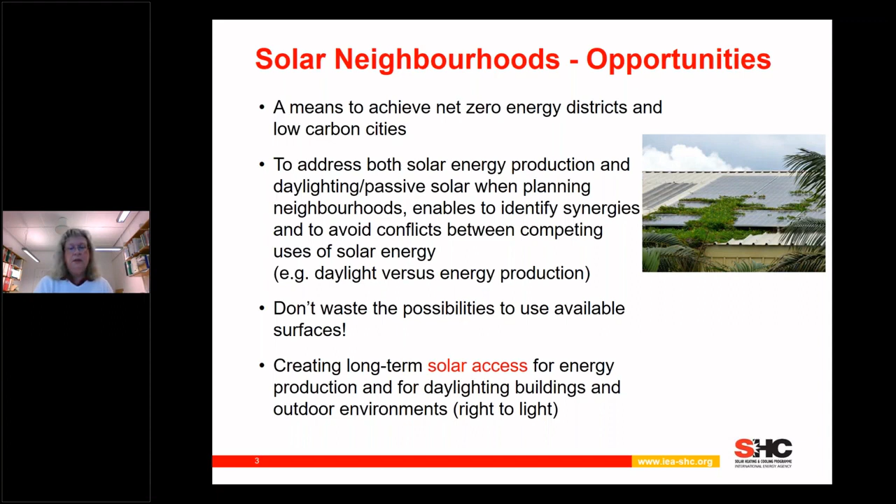And we need to create long-term solar access. This is very important - for instance, if you have a house where you put solar panels on the roof, you don't want your neighbor to erect a building on the other side of the street just one year later, destroying your solar gains and your investment. So you really need secure access to solar access for a long time, and this is something we need to be better at when planning cities.

Going to the project specifically, we started in 2019, and the project ends in 2023, the end of the year. So we are midway now, and the objective is to support key players to achieve solar neighborhoods that really facilitate this long-term solar access with good planning.

And we work on new neighborhood development and on improving existing neighborhoods as well. We deal with both active and passive solar strategies. We define a neighborhood as a group of buildings within a specific geographic area, often including different types of buildings and functions, open space and infrastructure. The neighborhood can be part of a large city, an isolated community, or something in between, and of course it can be connected to a district heating or cooling network or outside such - this gives different boundary conditions we have to take into account when planning.

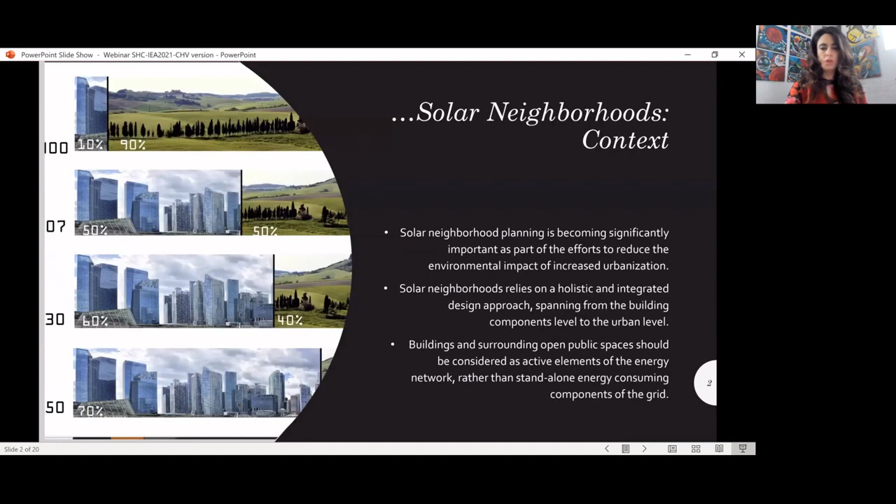Starting with a little bit of context, solar neighborhood planning is becoming significantly important as part of the efforts to reduce the environmental impact of increased urbanization, where by 2050 we expect 70% or more of the world population to be residing in urban areas.

Solar neighborhood relies on a holistic and integrated design approach that spans from building components and building level to the urban level. Within this holistic approach, buildings and surrounding areas, including public spaces, landscape, streets, and street furniture, should be considered as active elements of the energy network rather than standalone energy-consuming components of the grid.

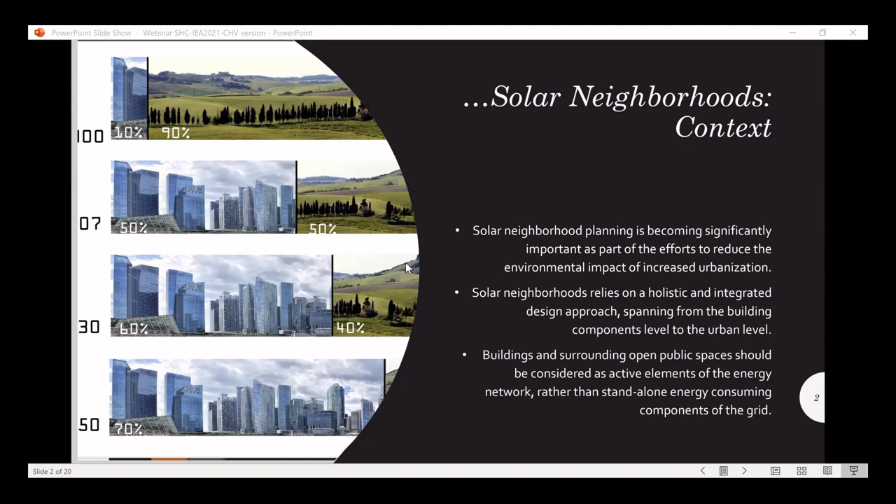So at the building level, solar building design relies on passive designs in buildings. In fact, passive design is often attached to solar building design. Improving solar access together with various design principles such as thermal mass, high insulation, and airtight envelope are some of the basic principles of passive solar buildings.

These principles can be implemented in all types of buildings, including residential, offices, and institutional buildings. Daylighting, passive heating of perimeter zones, passive and hybrid ventilation, coupling ventilation with solar chimneys, as we can see in some of these sketches, can significantly affect energy demand, reducing the energy consumption of buildings and their dependence on the local grid, which can also increase the resilience of buildings to climate shocks and climate risks.

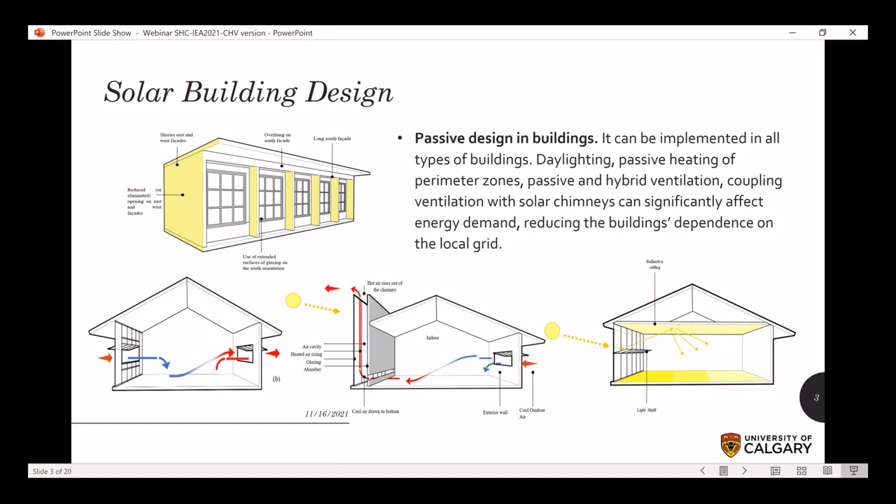Solar building design allows us to improve energy efficiency of buildings, designing building shape, layout, and building envelope to maximize solar access and utilization within the building, which affects the energy consumption of these buildings.

It also allows for better designed solar energy generation, since a well-designed building envelope can be exploited to integrate solar technologies such as photovoltaic systems, thermal collectors, or hybrid photovoltaic thermal systems for the generation of electric and thermal energy.

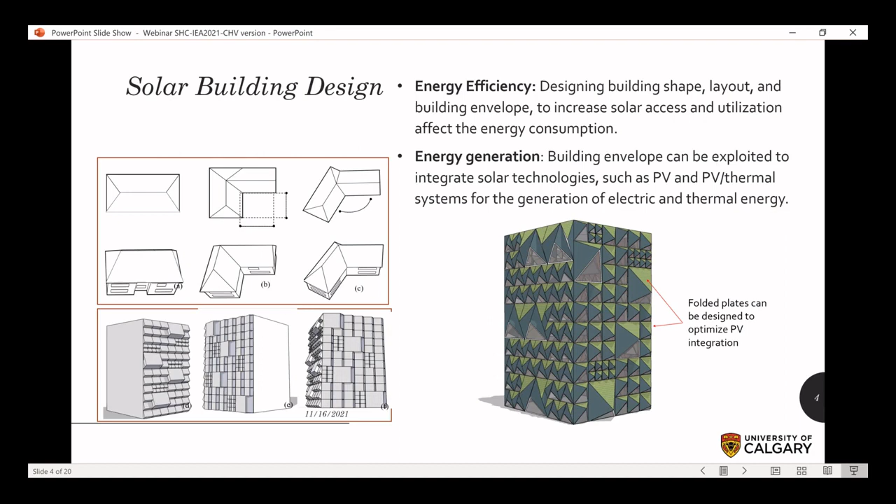Talking a little bit about building envelope design and the integration of technology, building envelope can be optimized to maximize surface area and exposure to solar radiation while preserving architectural and aesthetic flexibility. These are some examples of a theoretical study done by myself and my group at the Solar Lab at the University of Calgary.

We tried to optimize the building envelope shape geometry through different designs of folded plates that allow maximizing solar radiation on these plates. We were also integrating different types of photovoltaic systems in different colors.

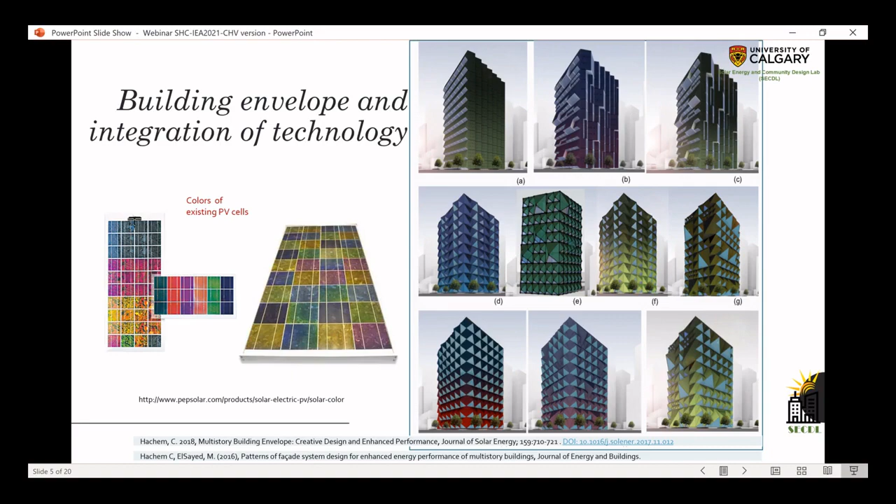At the neighborhood level, many aspects affect optimal solar planning. For example, the type of neighborhood and the building mix present can affect building designs and, as such, available surfaces for solar technologies. Also, the ratio of commercial to residential buildings within a specific neighborhood type is important, especially when the goal is to achieve net zero energy status.

An optimal ratio of commercial land area to overall built land area can be between 23% and 32%. This is according to a theoretical study we conducted, where according to this ratio, we were able to integrate enough photovoltaic panels to achieve net zero energy within a mixed neighborhood.

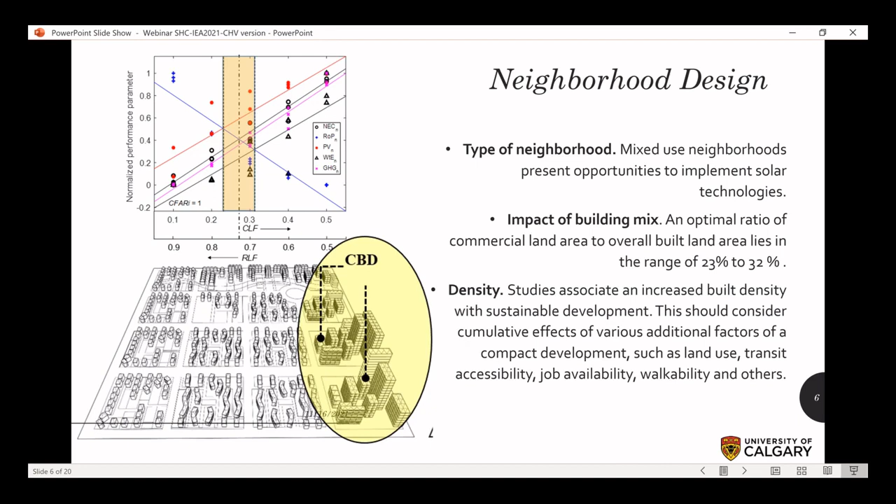Density is another important and critical factor in the design of solar communities. Studies associate increased built density with sustainable development, but this should consider cumulative effects of various additional factors of compact development, for example land use, transit accessibility, job availability within walkable distance, walkability, and others.

There are other important elements in the design of a neighborhood that also impact their solar access and solar potential and their design as solar neighborhoods. This includes green and spatial areas. Landscape can offer solutions for the integration of photovoltaic panels as well as solar thermal collectors, and allows really to generate more energy that can be utilized in these neighborhoods.

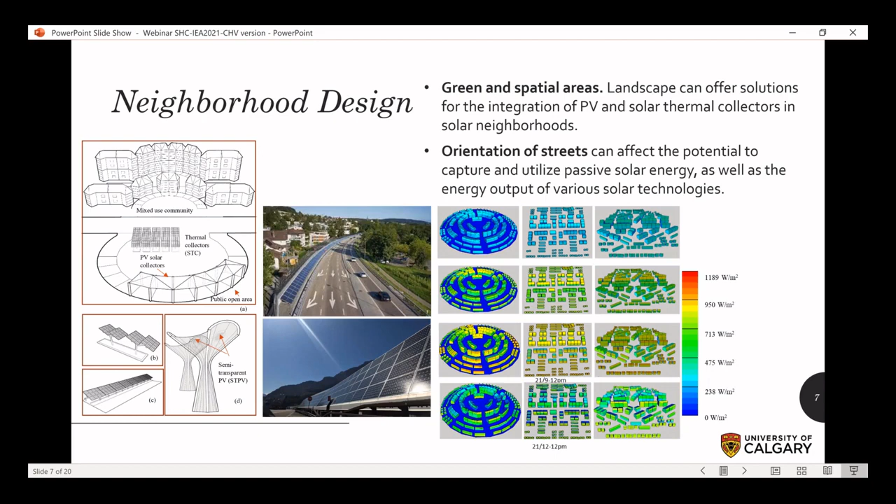Orientation of streets can affect the potential to capture and utilize passive solar energy as well as energy output of various solar technologies. As such, they really should be considered from the early design stage, and the buildings around them should be designed to get the best performance with the best orientation.

Now, talking a little more in detail about the work currently ongoing in subtask A, we developed specific designs of archetypes to study solar strategies. Archetypes in this task are considered as representative neighborhoods of existing or new patterns in different countries. This includes repetitive patterns of commonly applied design, such as streets, building types, shapes, density, etc.

Here is an example of commonly seen neighborhoods in North America, residential neighborhoods where we see a grid layout together with attached and detached houses.

Other examples of archetypes can represent uncommon or innovative examples. We have a few of these that were also presented and proposed by the experts in subtask A, such as Sinfonia in Bolzano, the campus in Norway, and so on.

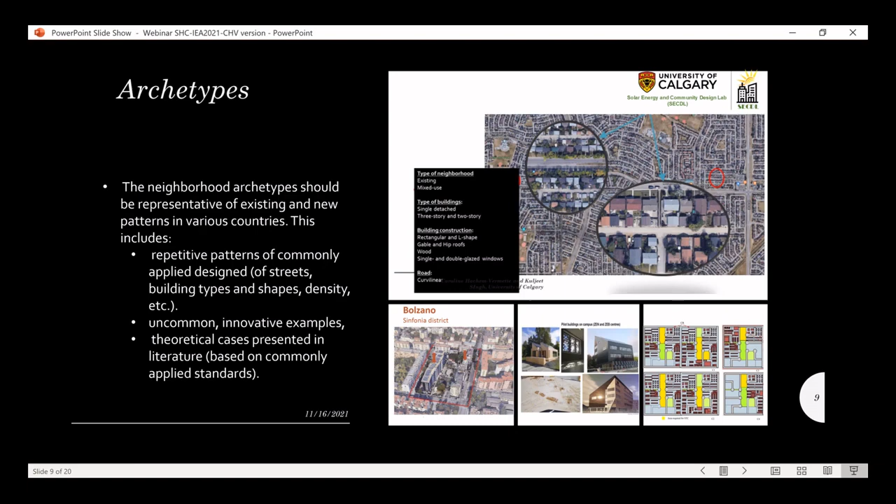Other archetypes can be theoretical cases presented in literature or especially developed to study different strategies. Here are some examples of theoretical neighborhoods, and I'll be talking a little about these and some of the results we obtained in a couple of slides.

A methodology is also developed to collect information about these archetypes, including building types, materials employed in buildings and building envelope, outdoor areas, and materials employed in those outdoor areas, streets, etc. This information is collected in what we call a matrix, an Excel form that can facilitate input into various simulation tools, allowing us urban level simulations.

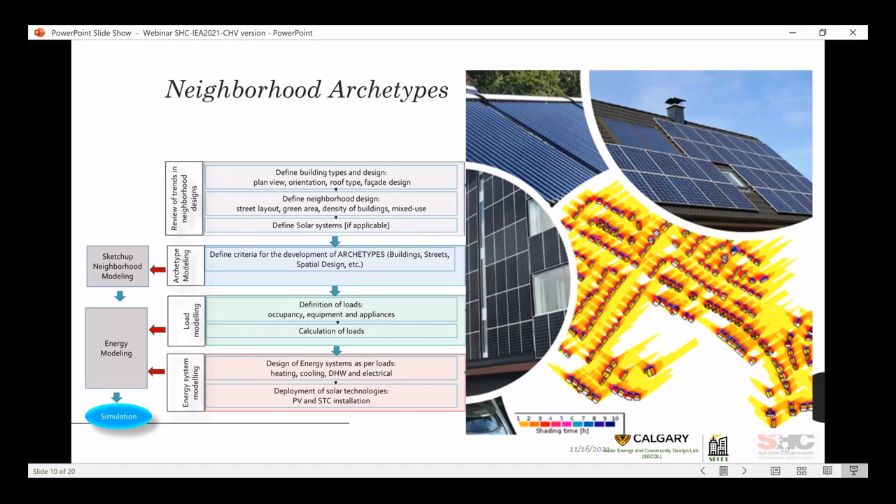Once the base neighborhood of each archetype is established, various solar strategies can then be analyzed.

Here I'm presenting some of the theoretical examples I just mentioned, what we call neighborhood units. These are small neighborhoods designed according to various sustainable measures, ranging from residential dominated neighborhoods to higher density neighborhoods with commercial centers that include different types of trades and different types of buildings.

The study aimed at analyzing various renewable energy sources and the role of solar energy for thermal and electrical production. I want to highlight that PV was accommodated on roofs and some portions of facades when available, meaning when we have high-rise buildings, and solar thermal collectors are accommodated in parts of the roofs when PV area allows for this, and in landscape areas.

Results of this study show that PV electricity plays an important role in fulfilling a significant portion of the total electricity need of all the neighborhoods, especially up to 95% for small scale or less dense neighborhoods.

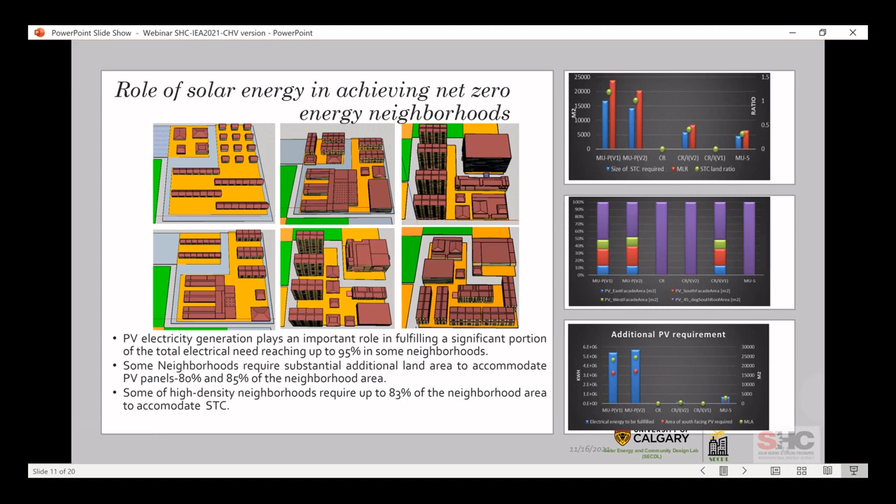Some of the high density neighborhoods also require significant additional area of landscape to accommodate the solar thermal collectors to fulfill the thermal requirement.

In this example, some of the small neighborhood units shown before were combined together according to their electrical energy performance, to allow achieving net zero electrical energy. In this case too, PV plays a significant role in achieving net zero electricity status. In all these neighborhood combinations, the major portion of PV electricity is supplied by roof-mounted PV systems.

The study also shows that on-site sources can supply between 19% and 45% of the thermal requirement for the neighborhood combinations, but we still need additional solar thermal collectors, especially in high-density neighborhoods and larger neighborhoods.

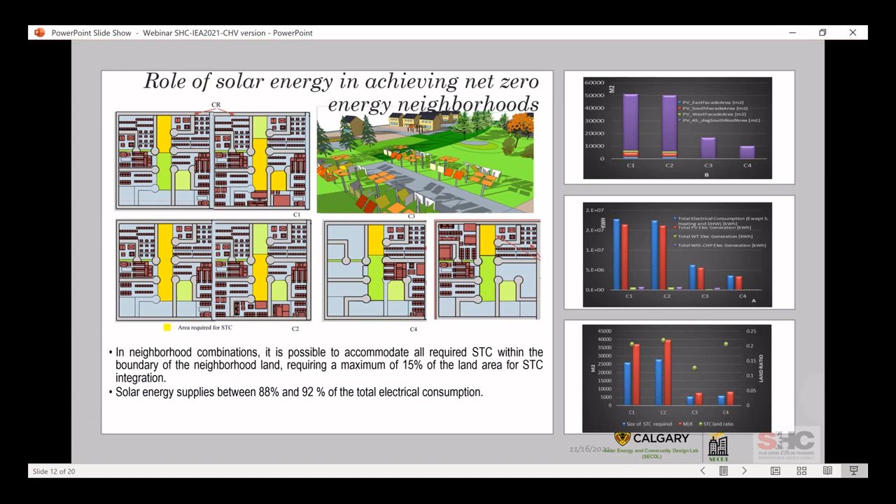This landscape area that's required to install these solar thermal collectors is significantly lower than the examples I showed before for the smaller neighborhoods. The landscape area can be about 15% of the total land of the neighborhood, which can be much lower than examples before, but also more feasible from an urban planning point of view.

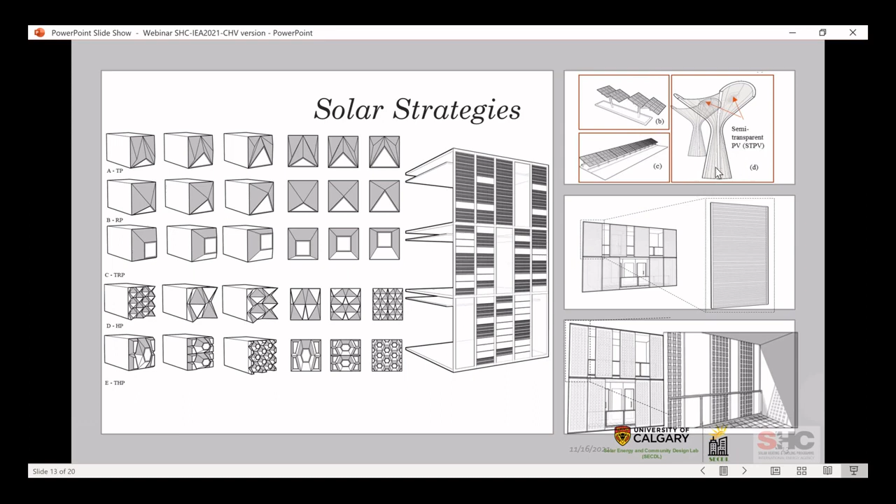Now, coming to the design of solar strategies and their analysis, different solar strategies will be analyzed using the archetypes or archetype concepts I just talked about. This includes, but is not limited to, integrated solar technologies in roofs and facades, and landscape integrated solar systems that can range from very traditional standalone elements to more interesting and designed ones. A workflow is developed to implement and analyze solar strategies, taking into account factors such as spatial design of the neighborhood, the optimal surface areas to integrate technologies, neighborhood operation, and interaction with the local energy system, both electrical and thermal.

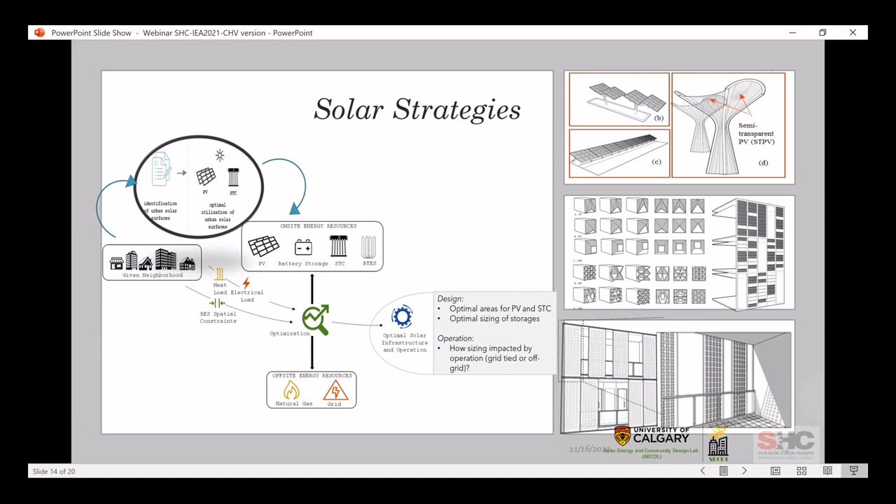Coming to the deliverables of subtask A, there are a number of them, but I want to highlight the most important. Two summer or fall schools are designed. One fall school was already conducted in September and October of this year, attended by about 14 PhD students from 6 countries who were trained in complex urban level simulations. Instructors from 9 different institutions were involved in the training. The next summer school will be conducted next year, hopefully in person in Calgary.

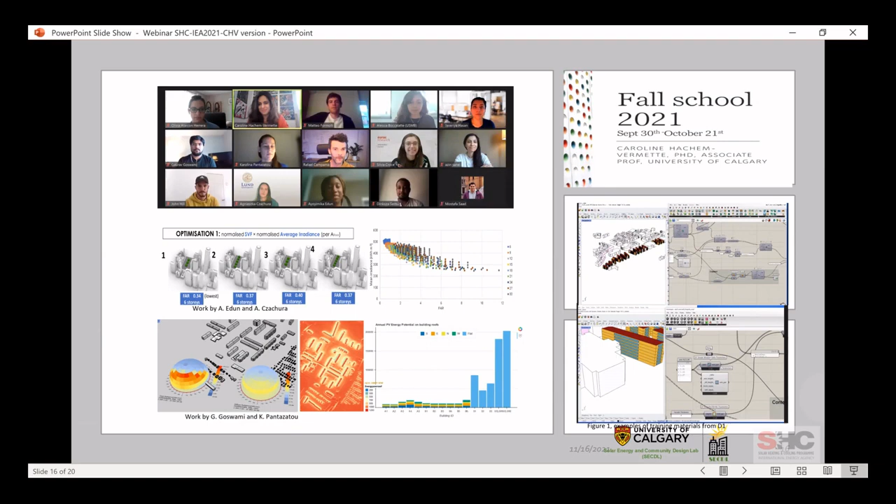The final deliverable of subtask A, still under development, will consist of a web-based database presenting various solar strategies and their potential application in example neighborhoods under different climates. Neighborhoods or solar technologies can be selected according to the type of neighborhood and the available archetypes studied, with results shown to give examples of how to apply these solar strategies and what their impact is. This can offer flexibility of design for planners, architects, developers, and other key stakeholders by presenting examples of potential solar solutions for different settings.

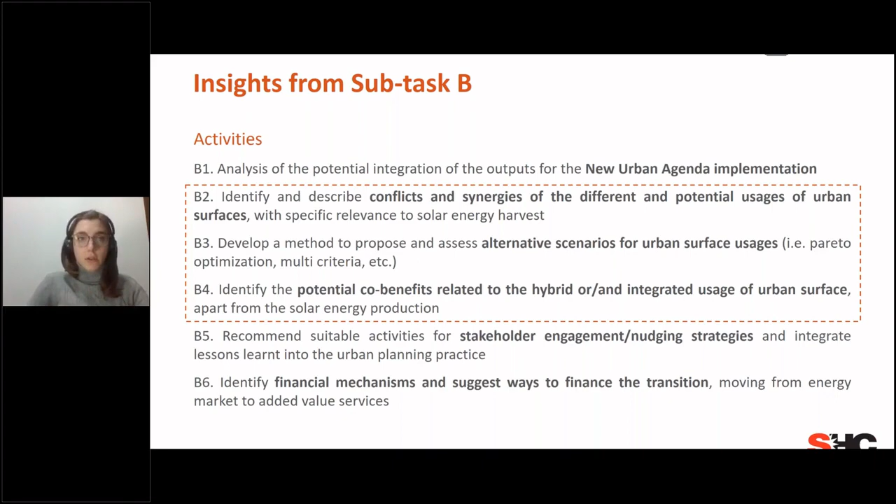So, welcome everybody. What I will present today, as Barbara already mentioned, is related to the work we are conducting in subtask B in relation to the use of urban surfaces and the related benefits in solar neighborhoods. In subtask B, we are focusing on economic strategies and stakeholder engagement with the aim to foster the use of passive and active solar strategies, looking not only at economic values but also added values and co-benefits that solar energy might bring. We have a broad range of activities, and today we will look at results and work in progress in three core activities related to the use of urban surfaces in solar neighborhoods. Why are we looking at surface uses in solar neighborhoods, and why are we trying to define the most suitable surface uses in such urban areas?

What we would like to achieve is having a broader focus. So we would like to consider all the surfaces available in our urban areas, which, as Barbara mentioned before, are a very relevant but limited resource. And we would like to aim to use them not only for solar energy production or passive strategies, but also for the integration of a wider variety of solutions.

Why this? Because actually the surfaces of our solar neighborhoods and urban areas have an unprecedented exploitation potential. We have seen from studies in literature that roofs allocate approximately 20 to 25% of the total urban surfaces, and the surface of the facades is almost double. So by using all these available surfaces, we might enhance not only energy efficiency and renewable energy production, but also positive environmental impacts.

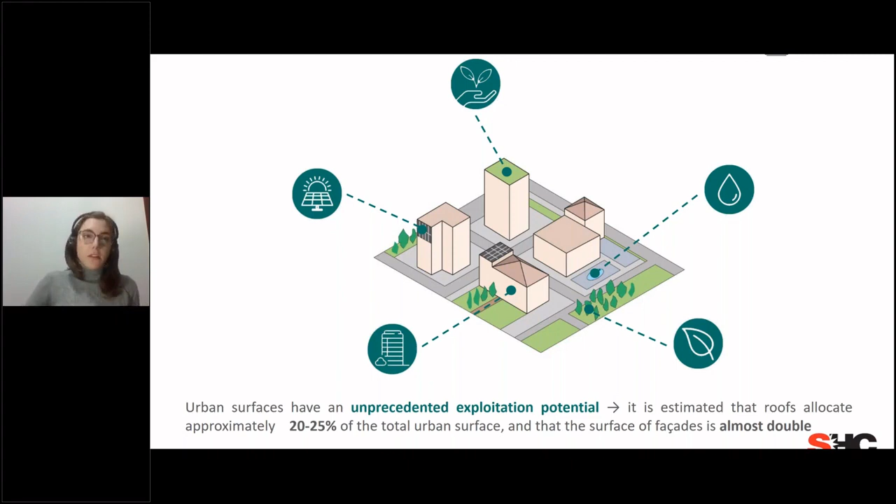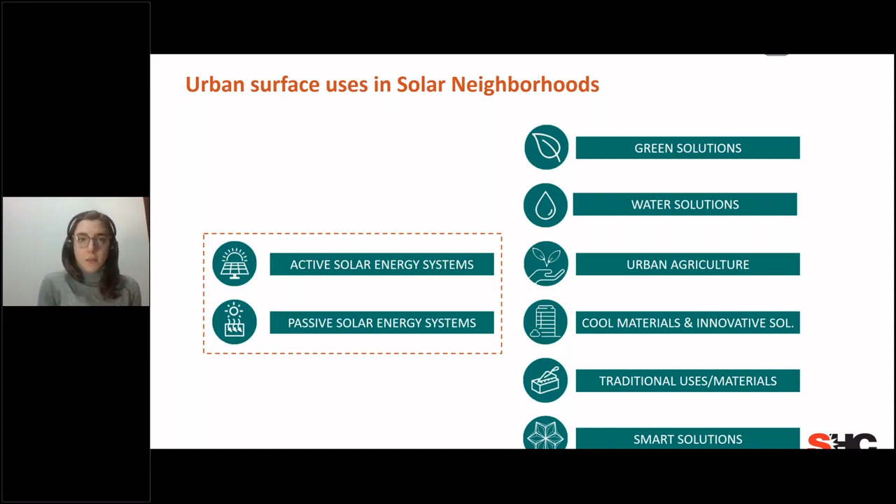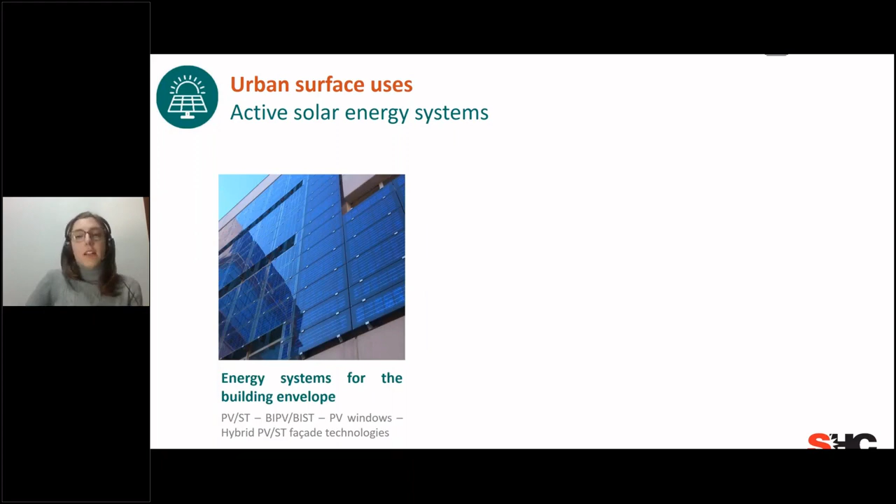So what we are focusing on is not only active and passive solar energy systems, but a broader variety of solutions which we collected and discussed among the task experts in subtask B. When we refer to active solar energy systems, we include not only energy systems from the building envelope, which are the wider known solutions, but also energy systems from ground surfaces, such as PV pavements and asphalt solar collectors for ground surfaces, and energy systems for urban features, such as the acoustic PV road barriers you can see in our picture.

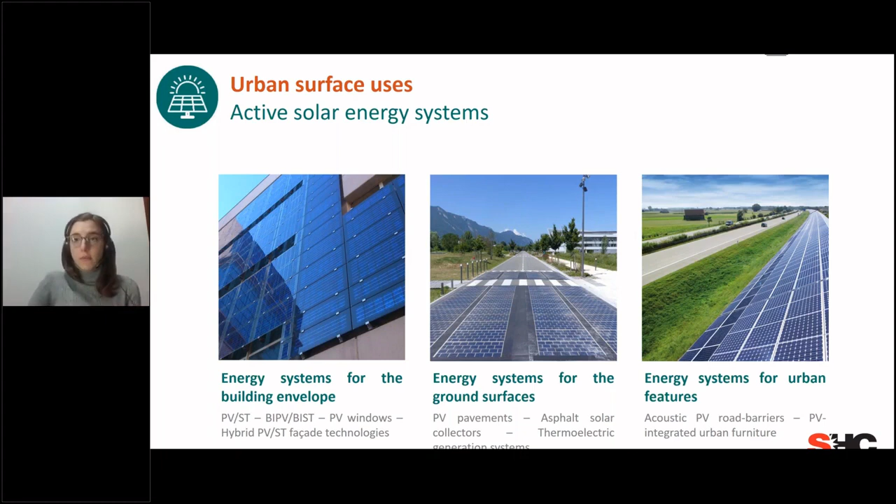And when we refer to passive solar energy systems, we focus on passive solar heating and passive solar cooling. But we also broaden our focus to other solutions, as I previously mentioned.

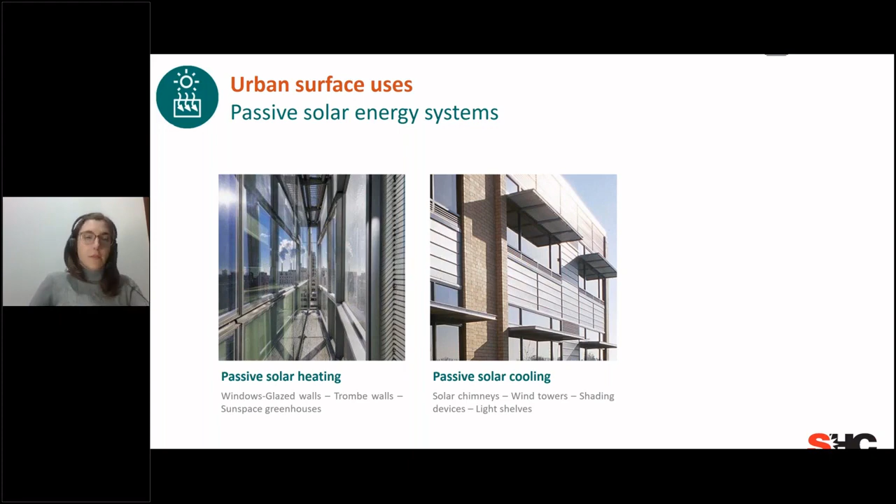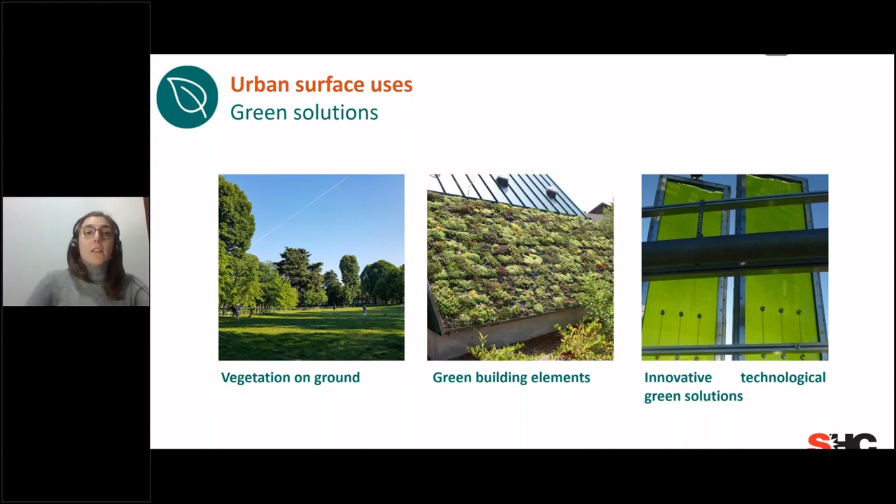So for example, we have green solutions, which include not only vegetation on ground, but also green building elements such as green roofs and green facades, and other innovative technological solutions such as microalgae panels for the production of energy. We also have water solutions which might be used in solar neighborhoods, from water bodies to evaporative techniques.

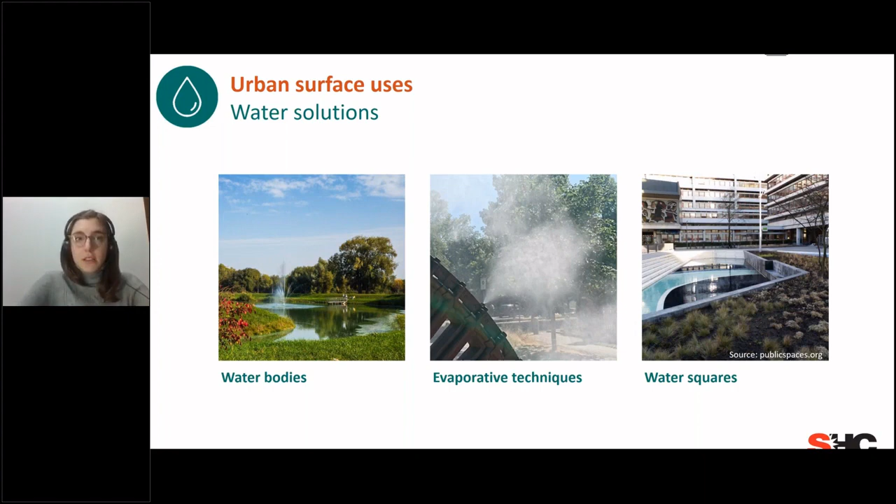These techniques reduce peaks of air temperature during summer, such as water squares. We also included the potential to use urban agriculture, both ground-based, building integrated, or other forms of urban agriculture, such as beekeeping in our solar neighborhoods.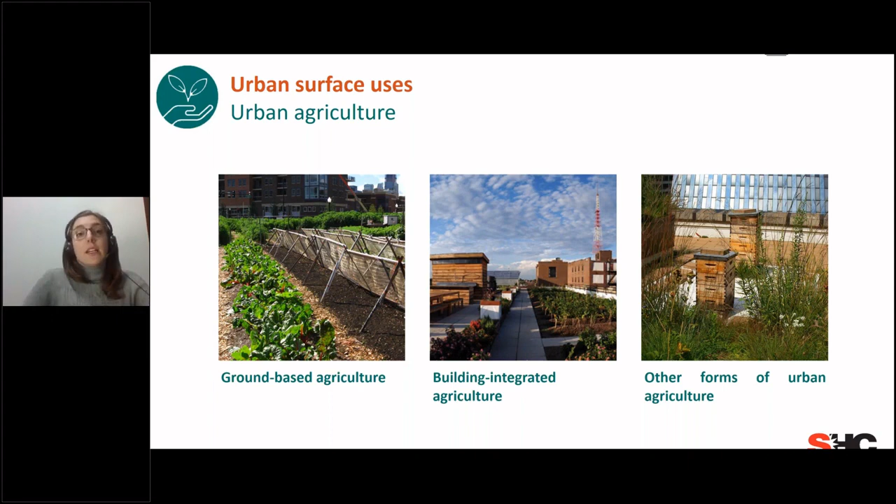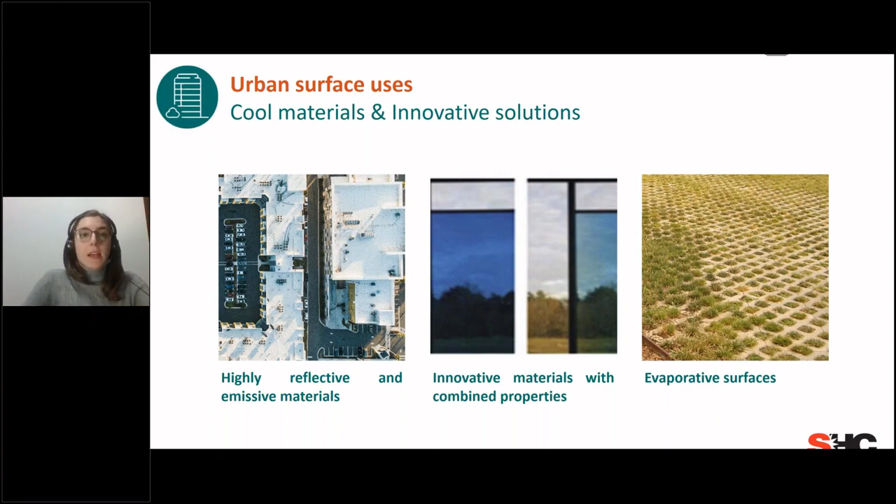And last but not least, we also consider cool materials, so highly reflective and emissive materials, which allow keeping the surfaces of the building envelope cooler, and which are also strongly related to solar radiation, and other innovative solutions. We also consider, obviously, the presence in solar neighborhoods of traditional uses and materials, which actually build our urban areas, but also the potential for smart solutions.

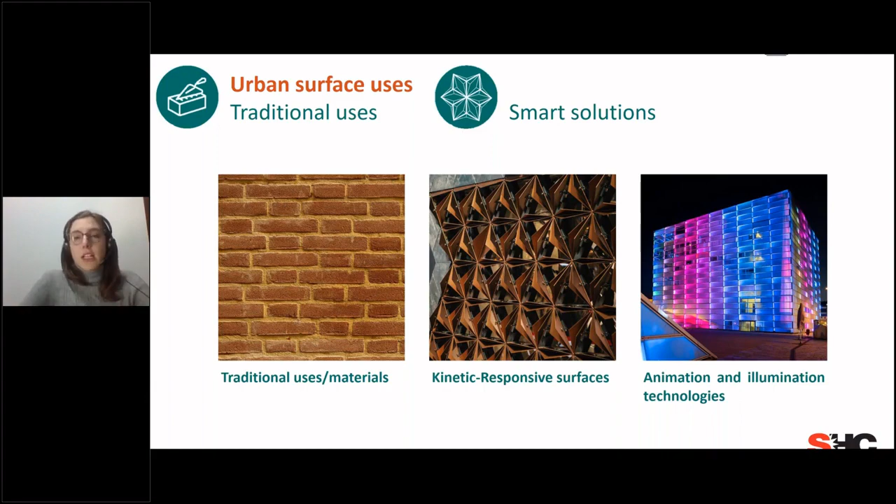What we then discussed in subtask B are the conflicts and synergies which may arise among surface uses. So the question we posed ourselves has been: can we integrate solar active and passive systems with other solutions in order to better exploit urban surfaces?

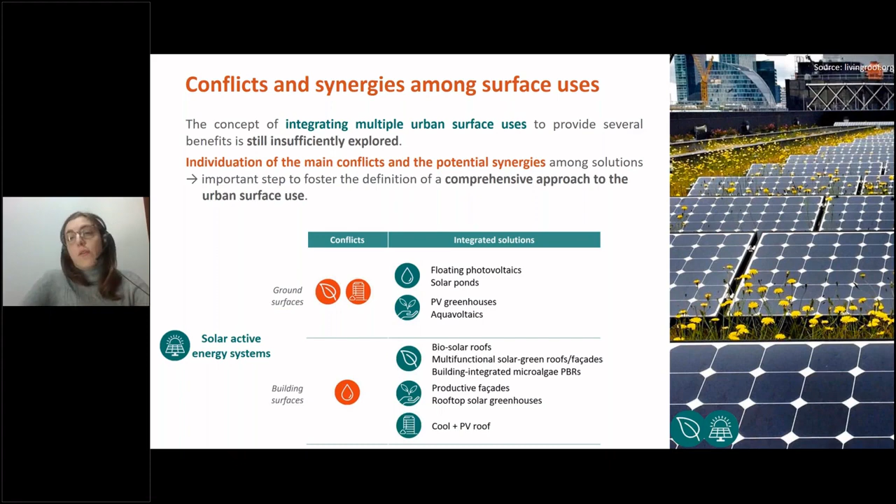What we did was create a sort of matrix in which we analyzed conflicts and synergies among solar active energy systems and other solutions. One case is shown in the picture on the right, a biosolar roof, which integrates PV systems with a green roof, which also acts as a cooling element for the panels and helps enhance energy efficiency. But there are also other solutions, such as multifunctional solar green facades and cool roof integrated PV. So just an example of what we would like to do in fostering the use of urban surfaces.

This is the case study of an industrial neighborhood in Bolzano we are analyzing in the context of Task 63. And this is relevant because it covers a large portion of the city of Bolzano.

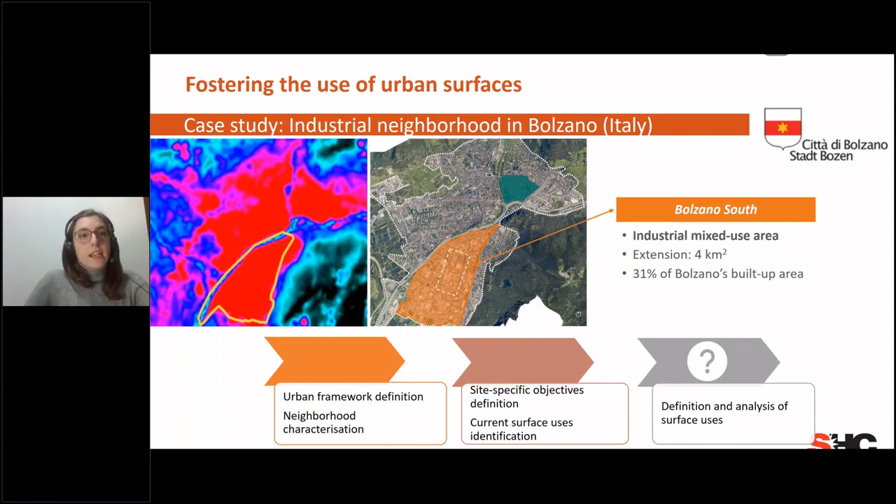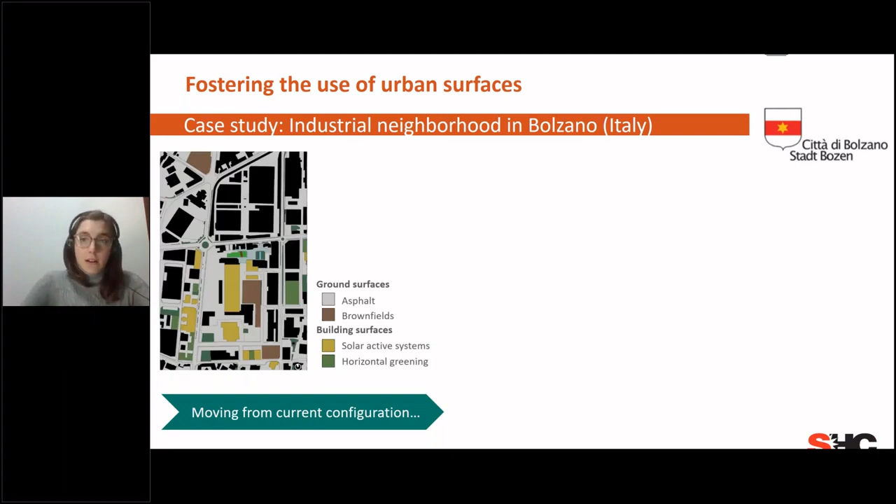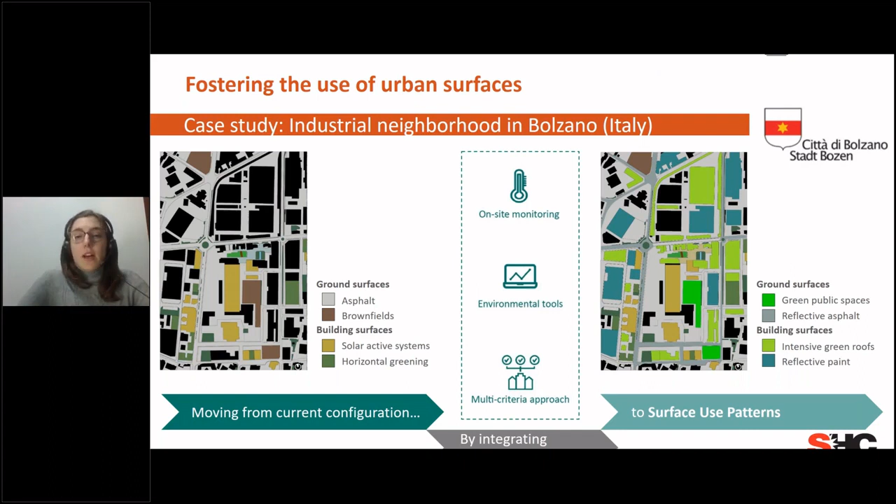What we would like to propose through our activities in the task is a methodology for moving from the current configuration of the district, which integrates common surface materials and some solar active systems, to a surface use pattern, a configuration of the district which integrates also more innovative solutions, where the use of solar active systems is enhanced, and there are also other solutions such as green solutions. How this might be done is through several methods, integrating on-site monitoring, the use of environmental tools, and also multi-criteria approaches.

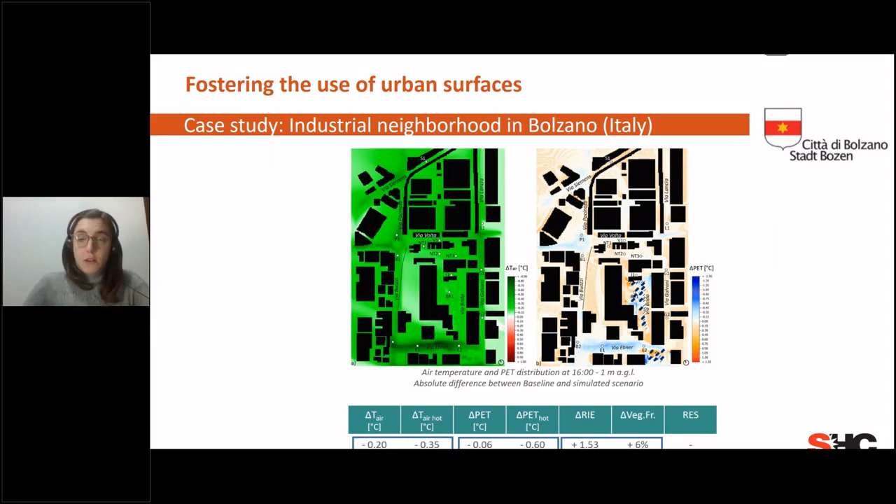So what's coming next in relation to these activities in subtask B and in task 63? First of all, by the end of February, we will release our first deliverable, a report on surface uses in neighborhoods, focused on how to define the most suitable uses, but also avoid conflicts and create synergies. If you're interested, keep an eye on our website, and you'll soon find our first deliverable.

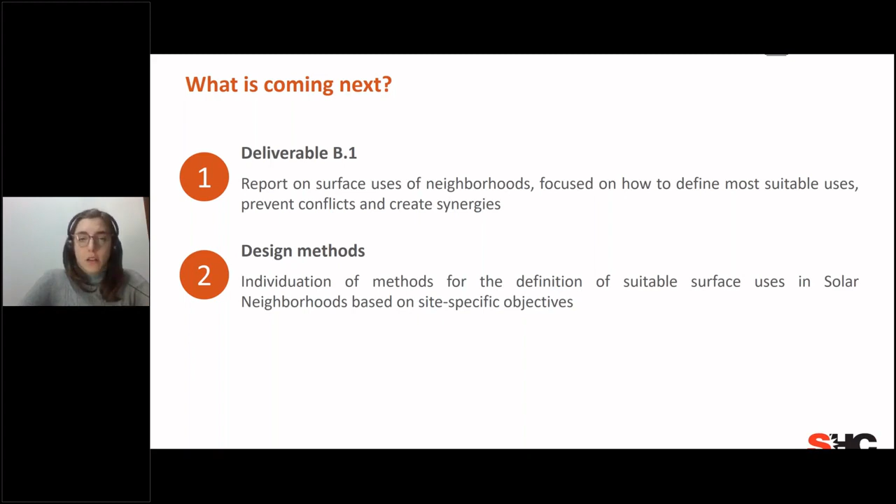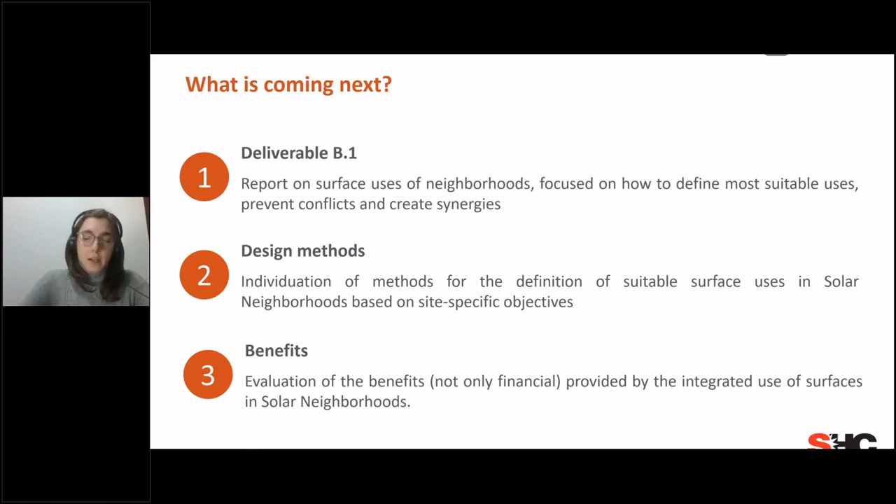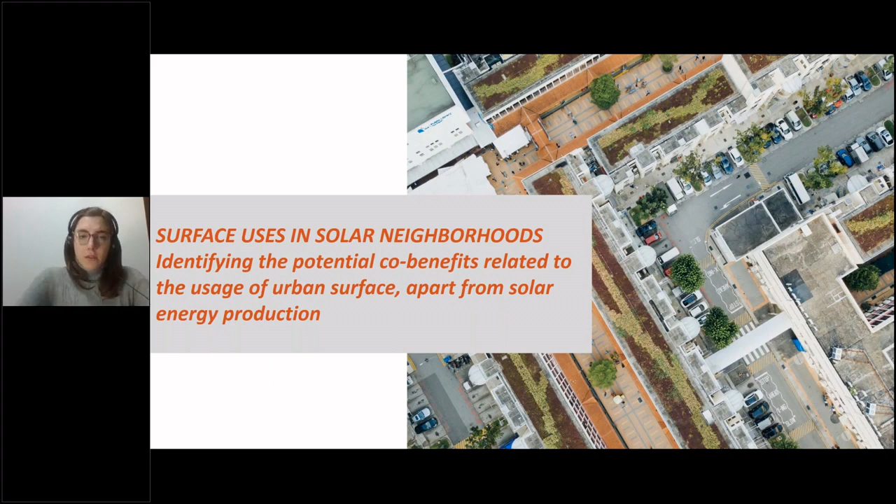But we will also focus, as in the example I showed you, on identifying methods for defining suitable urban surface uses in solar neighborhoods, based on site-specific objectives. And we will focus on the benefits, not only financial, but also environmental and social ones, which the integrated use of urban surfaces might provide in solar neighborhoods. We are also working on identifying the potential co-benefits related to the use of urban surfaces in solar neighborhoods.

What we highlighted in our discussion and work in the task over these two years is that urban surfaces are a key resource to tackle several issues related to urbanization and climate change. They offer benefits not only related to renewable energy production, but also other sustainability benefits, such as rainwater availability and food provision, as well as fostering climate resilience. For example, they allow improved management of urban climate, preservation of habitats and biodiversity, contribution to stormwater management, and amelioration of air quality.

What has been the first step in understanding the relevance of these potential benefits in solar neighborhoods? It has been a survey aimed at identifying priorities in the design and implementation of solar neighborhoods. We asked participants to evaluate 55 urban challenges on a scale from 0, meaning not at all relevant, to 10, meaning extremely relevant.

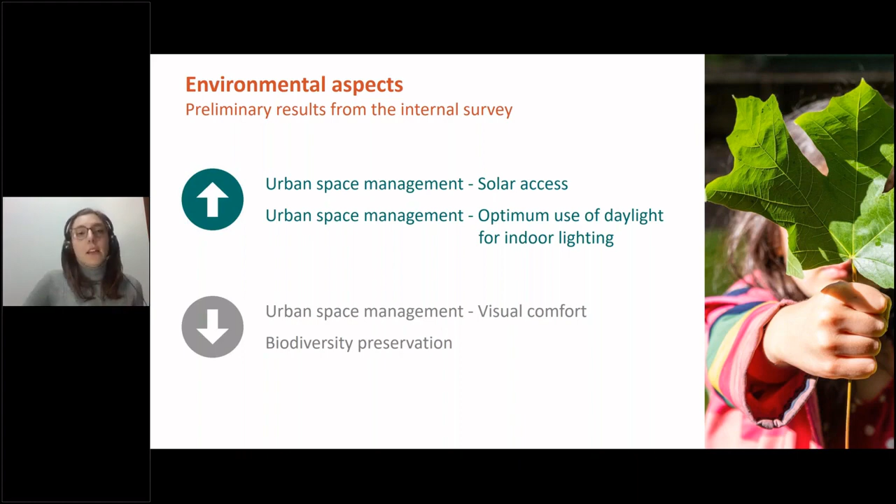That's why we are distributing the survey among external stakeholders and asking for your input. Another aspect we are analyzing is resource management. In this case, modern and renewable energy sources and the provision of clean and local energy consumption were identified as most relevant, while waste reduction and food security were less considered.

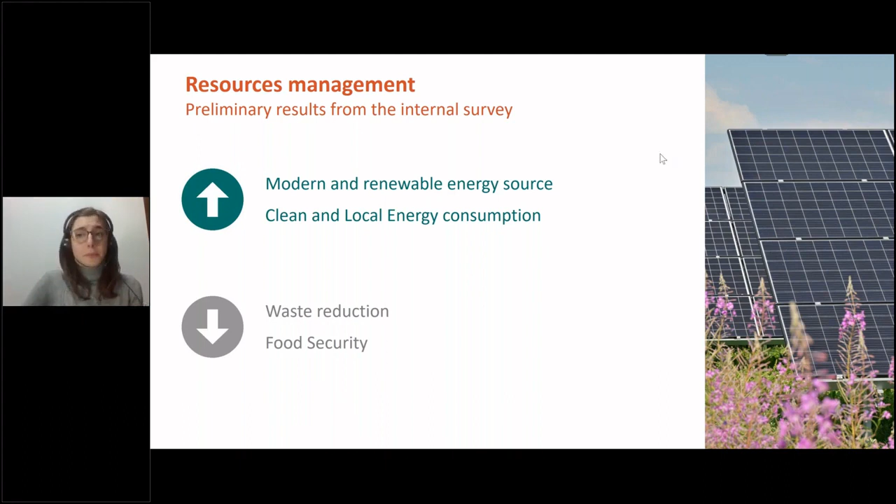If we move to social aspects, we also got some surprises. The presence of public spaces and increased quality of life for health and well-being were highly considered by the experts, but for example acoustic aspects or gender equality received a very low score.

We also analyzed economic aspects. Here, peer-to-peer trading of energy and prosumer-based business models are perceived as very relevant by task experts, while real estate value increase and the increment of energy prices less so.

So, as I mentioned before, the survey is open to everyone and will take approximately 10 minutes to complete. The answers will be anonymous, and the results will be reported in an aggregate way.

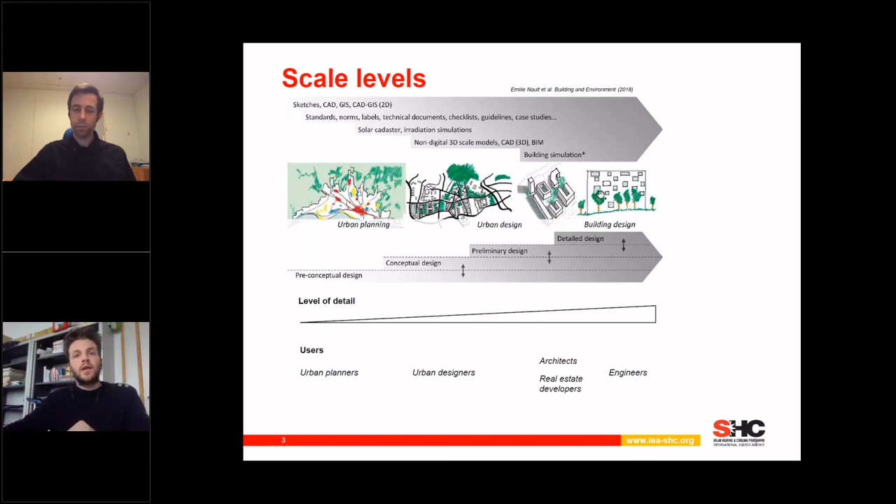In what follows, we will show you some achievements we have been doing in subtask C: one about gathering smart and relevant performance indicators, one about trying to gather workflow stories to identify current tools and best practice, and some comparisons of current tools.

For instance, when it comes to direct solar access, in some countries the legislation states that a bedroom should have at least 2 hours of direct solar access at a certain date, while other countries might say that at another date it's maybe 1 hour or 3 hours. There are pretty big discrepancies between countries, even though they are at the same kind of latitude.

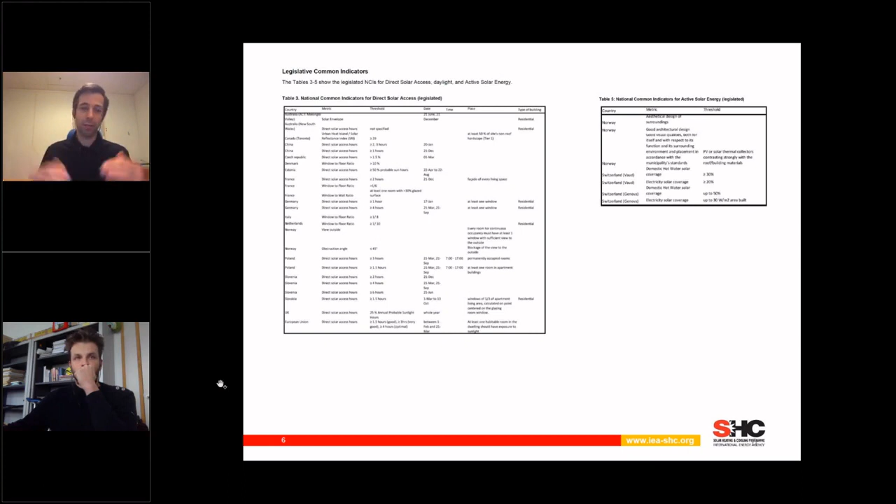When it comes to active solar energy legislation, not many countries actually prescribe that when constructing new buildings you have to install an active solar energy system, be it PV panels or solar thermal panels. So it's kind of interesting to see the difference between the different countries.

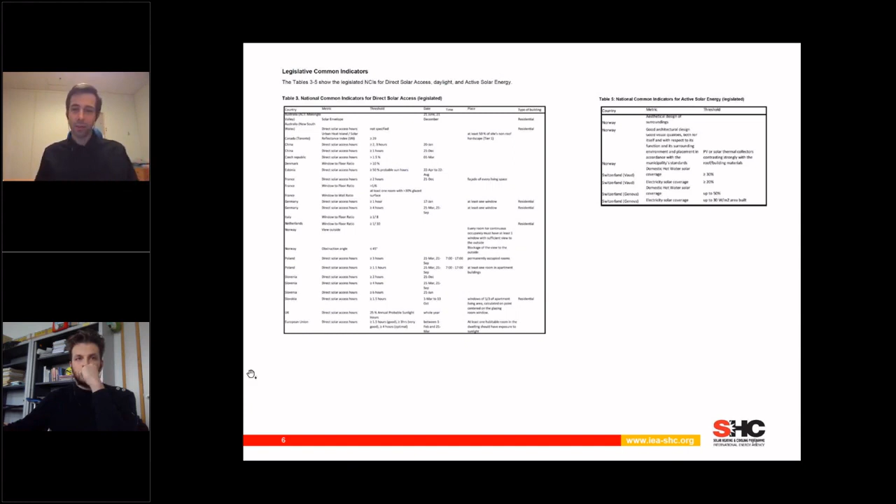Can you go to the next slide, Marta? Then we looked at the implications of those different common indicators. That's why we took 3 national common indicators to showcase the implications of those common indicators.

So we took a rather random courtyard building and then we simulated this courtyard building at different latitudes, meaning we looked at the different solar conditions at the different latitudes, and then we applied the different national common indicators to this. And then you can see on the right hand side, for instance, this graph here.

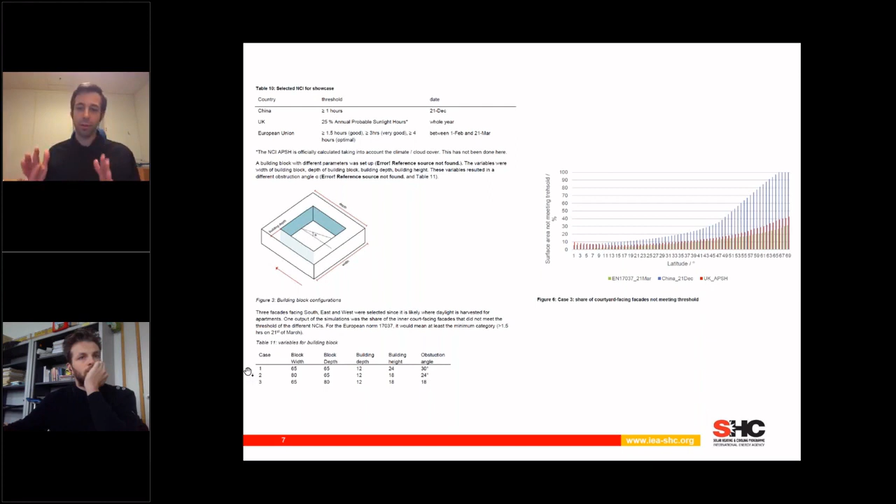That is the share of the courtyard facing facades that are not meeting the thresholds of the national common indicators. So of course, the higher on the latitude, the harder it is to reach those thresholds, and you can see this pretty well in this graph.

And again, it kind of demonstrates the fact that even countries at the same latitude might have a very different approach to what solar access is and what level is considered to be a good solar access.

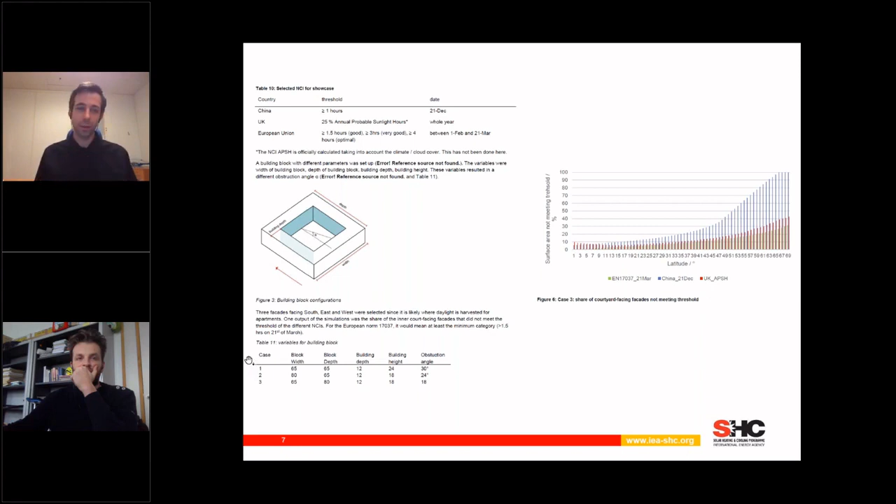Next, please, Marta. Then parallel, I would say, to gathering the national common indicators, we also were interested in how key actors in the design process of solar neighborhoods use tools, and that's why we have something we call the workflow stories, where we actually gathered this.

Thanks, Marta. So this is one example of a neighborhood which was evaluated by, in this case, a commercial consultancy company, where they looked at different performance indicators.

For instance, how much of the facade reaches a certain threshold of direct solar access. So could be 2 hours on somewhere in January, or what is the irradiation on all the surfaces. Those kind of things that they have worked on.

But then what we were interested also was not only the indicators, the key performance indicators, but also which tools they have used to assess those key performance indicators.

So for every of these workflow stories, we asked the people that wrote these workflow stories to provide input for the tools, but also output, and also describing the workflow.

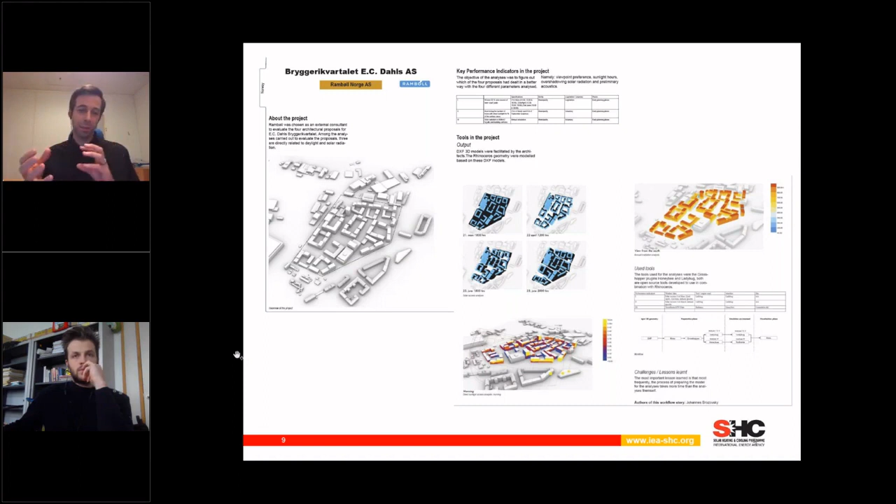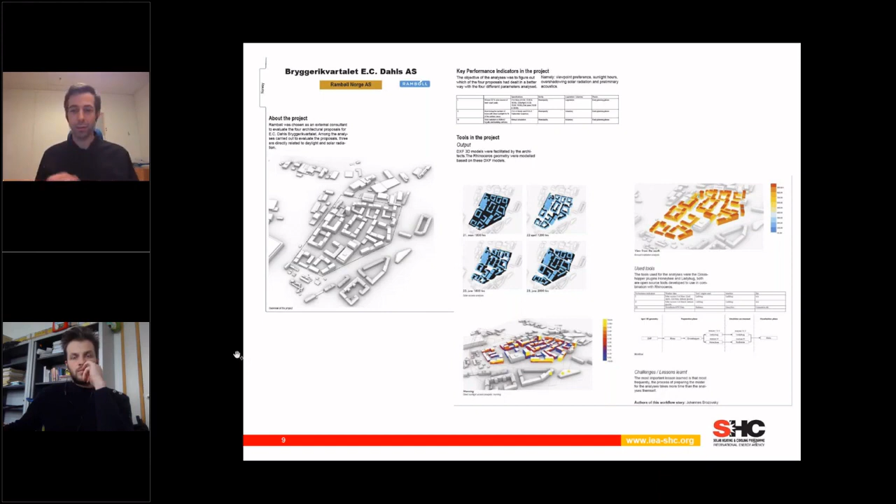Since urban planning is a rather difficult process, it might be that you have different data available with different quality, as Martin already said. So it might be that you have to use different tools in order to give answer to the performance of a neighborhood.

So what they did was develop a workflow that could be fed by different 3D modeling environments, but the outcome would still be the same performance indicator.

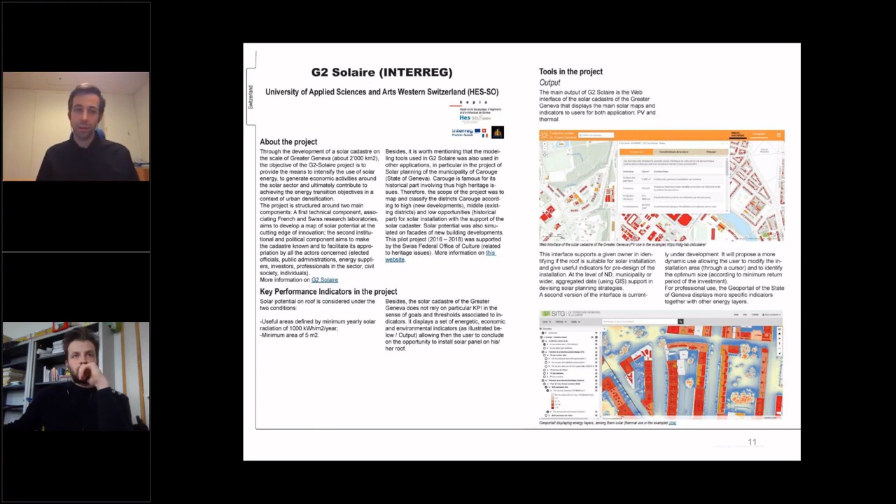And here also, this is not very simple to do all these kinds of simulations, and you have to find a way. Sometimes you even have to develop your own modules in order to get the result.

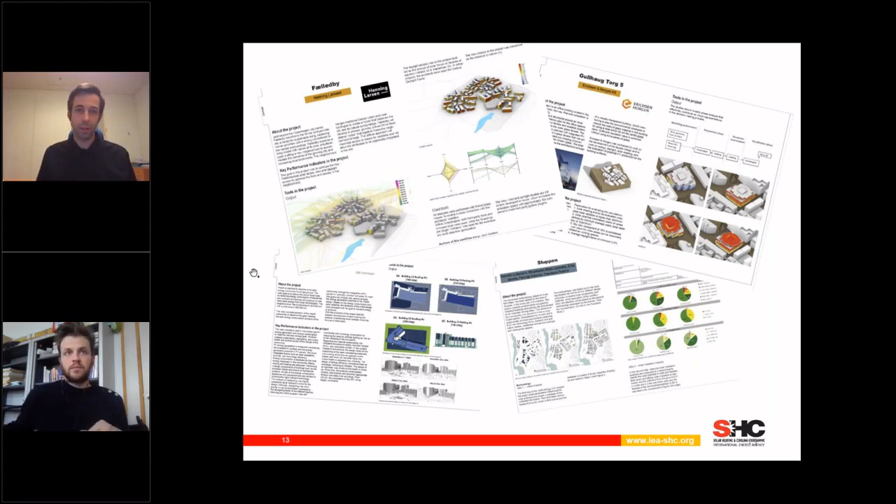Okay, so I will finish with one last thing that we wanted to study within the task. As Yuri just mentioned, there are a lot of different tools, and one thing we thought was to try to use a maximum of these tools doing the same task, what we call here a benchmark study.

For this study, we set up some rules. The rules are quite simple. We use two different districts, one which is like a grid district and the other one which is more random. It's happening in Geneva, and we provide it to experts with the geometry, the location, as well as the weather data, so that everyone has the same simulation condition, initial condition.

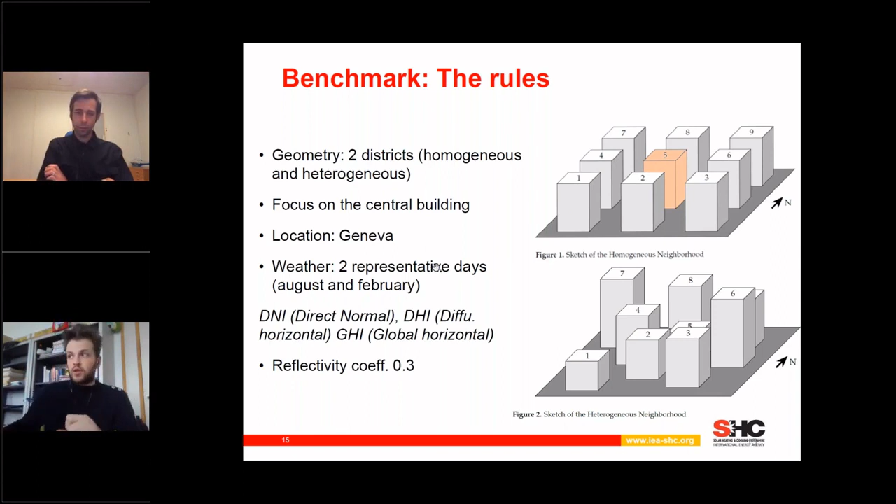Regarding the tools that we used, here you have a list on the left-hand side of the tools that we have been benchmarking. One thing that may be interesting is that these tools were not originally designed for the same purpose. Some of them were more designed to perform daylighting study, whereas others were more about energy in cities, or even the solar map of Geneva we just talked about. There is also one BIM and one model which is used for weather prediction in physics.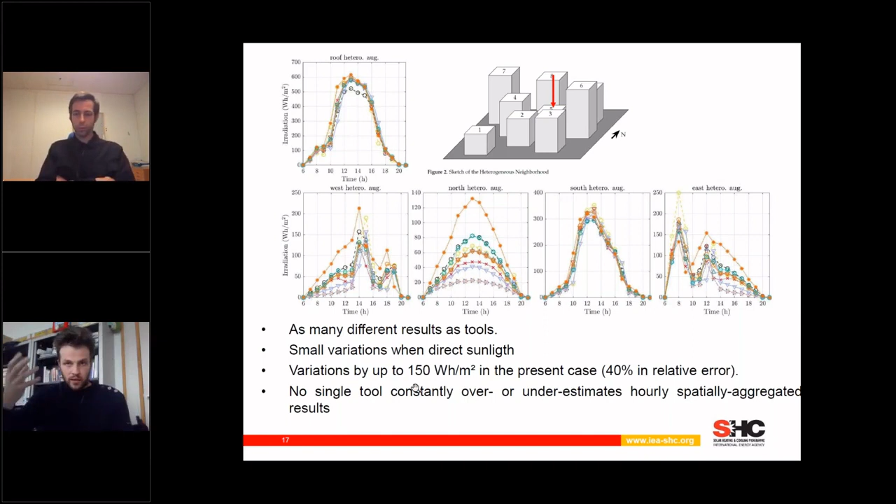We can see there is usually less variation when there is direct sunlight, for example on the roof or on the south facade. We have variations that can reach up to 150 watt-hours per square meter. Also, there isn't one tool that constantly over- or underestimates the solar irradiation predictions.

Another way to analyze the data is to draw this kind of facade mapping. Here I went back to this heterogeneous district, showing the east facade at 10 and 11 a.m. What you see here is the distribution of the irradiance. When it's red, it means a high value of irradiance, usually direct sunlight, and when it's yellow, it means a shaded part of the building.

Once again we have very different behavior, and we don't have two identical results within all our results. Some tools predict a sharp distribution, such as ENVI-met and CadSol, while others predict a smooth or fuzzy distribution, for example Indalux or De Luminae.

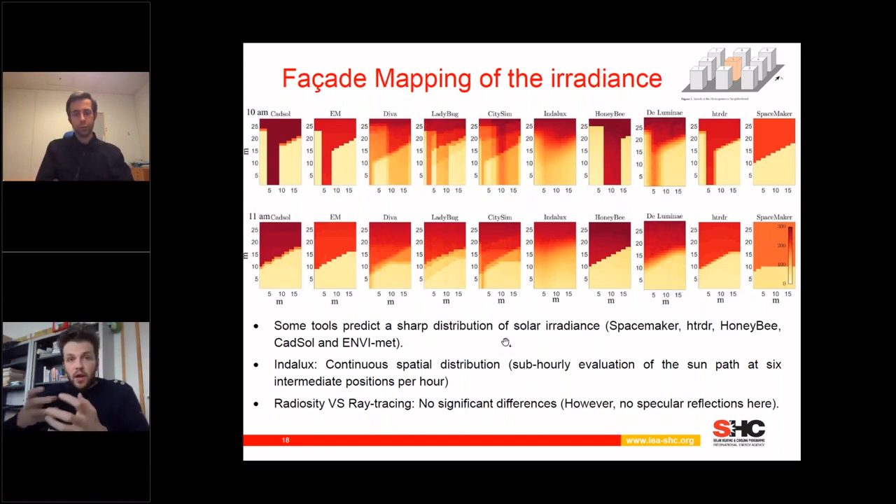This is due to many different ways to model, which I won't talk about in detail here. It could be due to the physical modeling, or to the way the data is handled and how the workflow is built.

So to finish, here we are at the midterm of the task. What we plan to do is create a roadmap for improving workflows and solar planning tools. The results and studies we showed you are here to set a state of the art, a status: where are we now, what are the tools, what are the KPIs, and how do different tools perform compared to each other.

Then in the second part of the task, we want to build from here a vision of what we should do, setting different milestones in order to improve this workflow in the context of a solar neighborhood. Thank you for your attention.

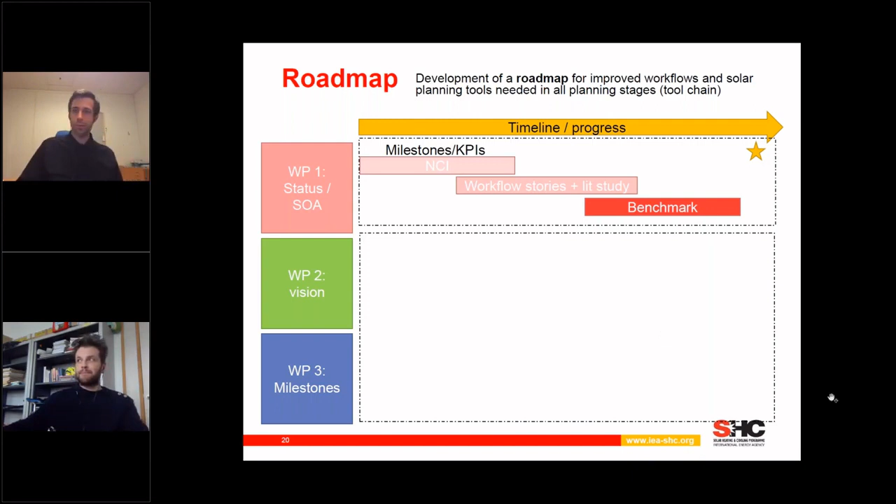I think we have some really tricky questions, but the first one I want to address to Maria, because one of our participants wants to have again an overall definition of solar neighborhood. So what is your definition for this solar neighborhood?

Well, as I mentioned in my presentation, a neighborhood is really a group of buildings, which could be of different or the same type and uses. But a solar neighborhood is, I would say, when you strategically use solar to achieve sustainability goals like zero emission, zero energy, or plus energy neighborhoods, and so on. So it's when you're really focused on developing different solar strategies, whether passive or active use of solar.

Okay, thank you. And then we have questions which were addressed to Caroline, but we said we would try to get an answer for them here. One is: what is the assumed load profile for the simulations?